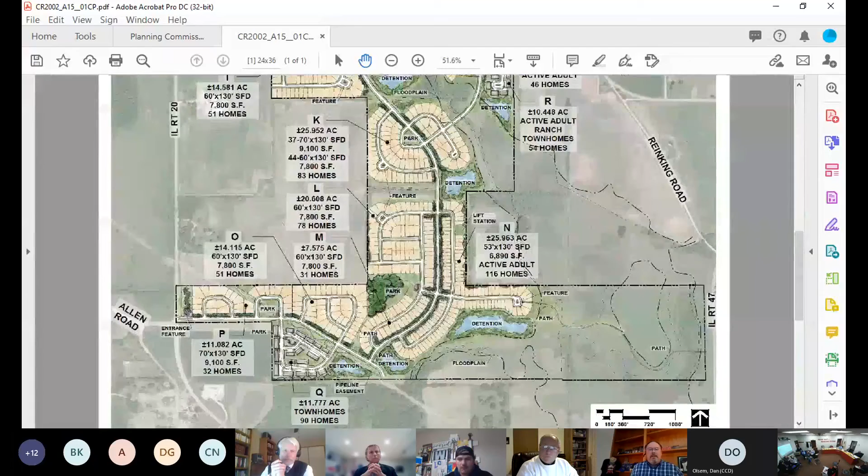And it's a really nice mix. It's not one ginormous spot. It's sort of feathered throughout the site, integrated in, and it goes all the way from the south side of the site to the north side. We're really excited about this. We think the revised plan gives several different types of housing units throughout this entire site, as well as the open space components. We're fortunate enough to work out having the school site, which I think everybody likes to see. So we're really excited. And if you have any questions, I certainly can answer them for you.

Before we go there, one thing I'd like to point out - you heard Rich mention the open space a number of times, right? I think that's the part of this plan I'm really proud of, and kudos to Rich for his plan. At 263 acres, this is more open space than the currently entitled plan. But as importantly, this plan actually impacts fewer trees and wetlands than the current plan does. I think that's a huge plus for the project, and I'm pretty excited about it.

So with that, I'd love to answer any questions the committee may have.

So when you say fewer trees, what's the estimate of total trees being taken down - or those being saved? I'm just curious about the numbers, the data.

Yeah, there are a lot of tree stands, mature oak tree stands on the site. We did do a tree survey, but we haven't actually done a count. It's just those areas, and in particular the area up near the school - there is a heavily wooded area there. Originally, we had a whole neighborhood in that area in the currently entitled plan, with a number of roads going through that area and a wetland in it.

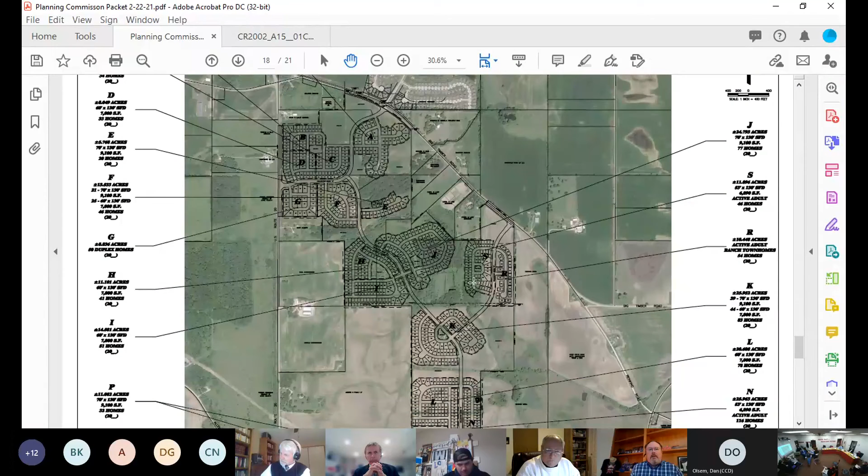And we're actually going to be coming in and planting thousands of trees as part of this development. We'll certainly be able to get you more detail as we develop the landscape plan further, but it will be thousands of trees, and those will be high quality trees, taken care of as part of a larger master association. Again, can't stress enough, the preservation of the open space areas is definitely something we paid close attention to here.

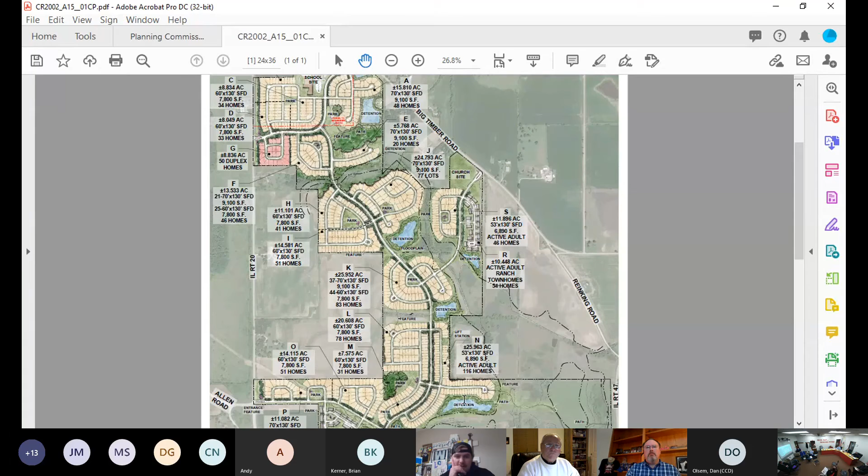Josh, go to the north side and see. Carol will show you. We're right next to the church site. Up that way. And the land that's above the high school is about 100 feet higher than ours.

So we are forced to take that water in every rain. And if it's a 4-inch rain, it's going to be going across the road. It was across the road right in the middle of the road construction this year, right in the middle of road construction in May. May is usually the wettest month.

So that bridge is 91 years old. We're pretty concerned about that.

And then at the Burton and Tuziak in our corner, that is a low spot because the water is coming onto my property in that middle green stretch, which is higher than the center of the road. So when that whole field fills up, then it goes over the road into Miss Burton's.

You got it pretty bad. Yeah, and the county thought they would help her a little bit. They added a culvert, but that didn't help. And then down by the 91-year-old bridge, before there were houses, the water could get around there and get out some, you know. I've been there since before those houses were there.

So sometimes it's 4 inches deep, which is 4 fingers high, and it's 210 feet long, the water that's going over the road. That's a lot of water. You know, that little box culvert is only 3 feet tall and 4 feet wide.

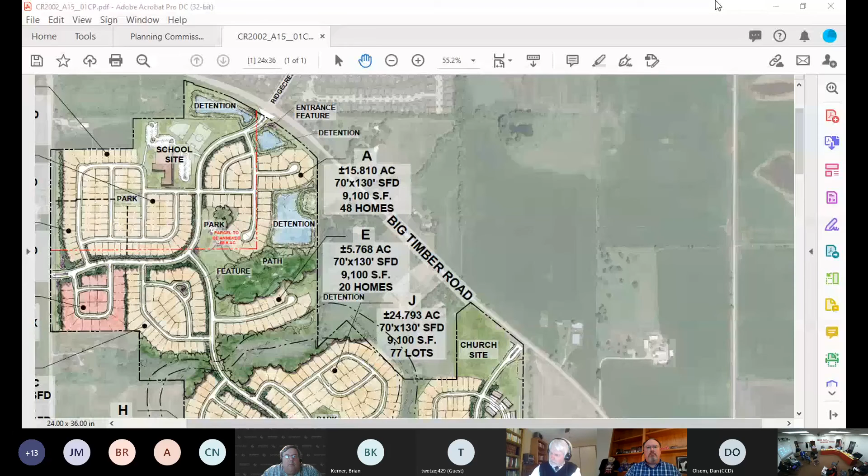This whole area, these are all trees that haven't been grazed or farmed in 40 years. Or is that Jay, I believe. That is Jay. The last fence was white oak fencing down there. It is really up a hill. And they're referring to pod E. Jay. Oh, sorry, John A.

Yeah, there are some trees in that area, and we are showing impacts to some of those trees. But what we do in neighborhoods where we do have trees, and this was on the current plan, the currently entitled plan as well, we'll try to remove as few trees as possible in those areas.

But that's solid trees where you have houses designed at this point. There's approximately, I don't know how many 1,000 foot that is, but that's solid trees, mostly oaks. And you have houses built right over the top of them. You have taken them out. Now how trees...

Roots kind of hold water in a way, which might affect our properties. You take all the trees out, the trees aren't holding the water, it runs more swiftly. Let's just think a little bit more environmentally, perhaps. I'm just throwing that at you all. So, okay, that was my tree thing. Don't get me started on the trees.

Okay, number three. When have the latest studies been done on the endangered species of that property? And are there any new endangered species?

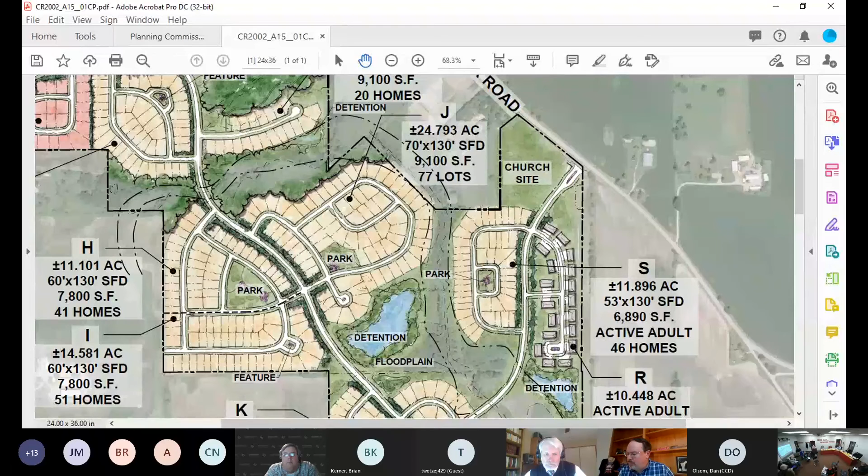You want to know where I am now? Which entrance? Because the entrance is already there and paved and prepared for the primary entrance for the Oakstead community. That's the one down at the end by us across from Lakewood. He's down further from where we are. Have them lower their map a little, other direction. There you go, down, okay.

There was a proposed access right here, right across here. Okay, which is no longer there. Correct, but it's in the county's record because you signed off for it. Yes, and she says it's there. She lives on that side of the road.

Because I've kept it potential commercial, multifamily and whatever. And now that he doesn't need it, it's not saying that if someone buys mine commercially, because the county signed off on it, I think it was every quarter or half mile there was supposed to be a stoplight. The town told them where it was, the speculators told them where it was gonna be. Right, see, some of you guys probably weren't even born yet. We've gone through this, we've been through this, so.

Okay, now another question on that. If the places, or when they are widened, is eminent domain going to be used? And will there be condemnation for the public good, which means we don't get paid?

That, again, I really couldn't speak to. Route 20 is not village maintained, managed, or owned. But Big Timber Road would be entirely county. Even when you get your subdivisions in, it's not gonna be part of the town.

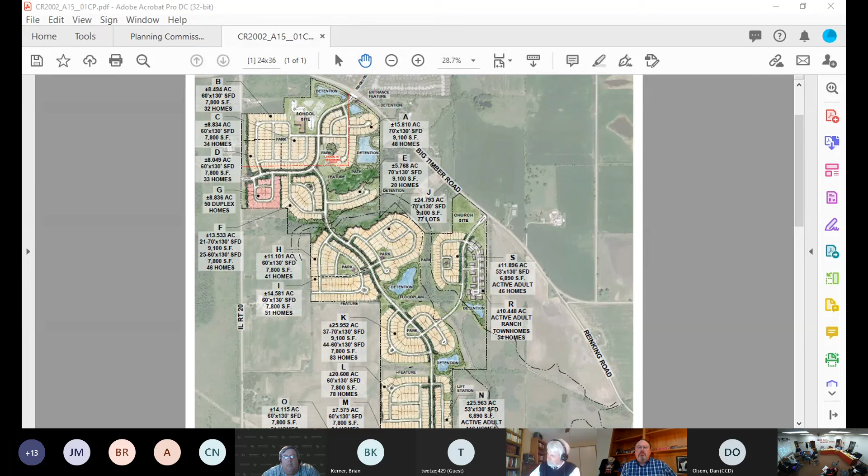If I can put a finer point on it, if we need another access road, entrance or curb cut, does that come before us again as a new proposal or amendment? Well, I guess we'd have to come back anyway. This is a preliminary approval that we're requesting, so we'll have to come back with final approval, at which point we would know whether the agencies would require us to relocate those, and then we'd have to get approval from the village for that.

Okay, thank you. Any other questions, comments from the planning commission? Mr. Rossetti, Mr. Wetzel? This is Bill Rossetti, I'm good, Brian. Thank you, sir. Yeah, I'm fine too, Brian. I don't have any questions.

I have a question for Crown just as it relates to stormwater runoff currently on the site. Once developed, all of the stormwater that is currently overland or within the drain tile system will be managed by a public stormwater infrastructure, correct? Yeah, and Tim knows Kane County ordinance better than I do, but we are required by ordinance that any field tile we encounter, we have to tie it into our system, which then takes it into the detention ponds.

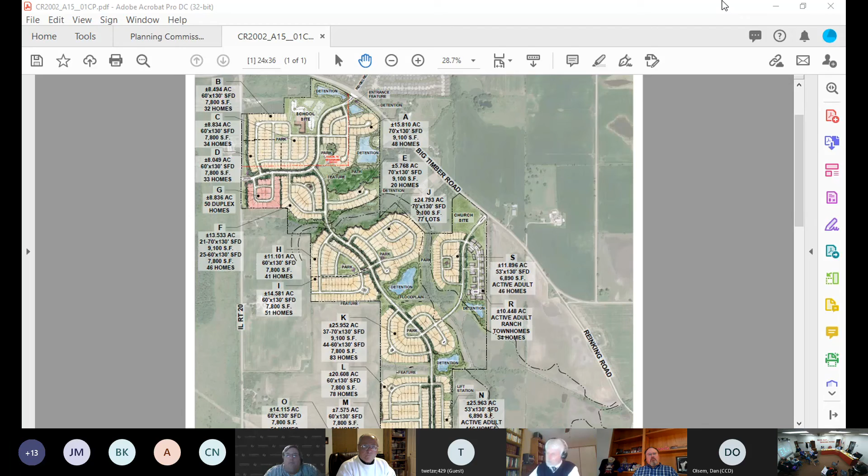So, yes, sir. Now I have a question. Now, what we spoke about this evening, this is all on record, right? Yes, sir. When we talked about how water is going to go into that detention pond behind my property, it's going to leave and go away from my property through some other system to another detention to be pumped to another. Okay, I just want to make sure. Based on my last experience going around with the development, things weren't as, not as much on record, I guess, as a whole.

Mr. Schuster? I'm here. So just in order, so that everyone in the room, I guess maybe including the commissioners as well, can you please give us the layman's definition of what we are voting on tonight? I don't want anyone to leave the room thinking that when we vote yes, we're voting to build this. You know, if you could give us the layman's version of the paragraph-long item that we are talking about and going to vote on today, just so everyone is on the same page as we move towards a vote this evening. I can do that.

At the close of the public hearing, whenever the chairman determines that everyone's had a chance to speak, there will be two motions that the commission should make and consider. One is to zone what Mr. Olsen has referred to as the Wiesman Farm. That's the new property that Crown acquired and wants to add into the Oakstead development. That property, because it's going to be newly annexed, has to be also classified in a zoning category. So the motion would be to classify that property in a planned residential development district, the same as the rest of Oakstead.

After that, the second thing before you tonight is an application to recommend approval of the revised preliminary development plan for the entire Oakstead property, which is now a little larger because they're adding the Wiesman Farm. And they've changed some of the features of the original plan as well. So you're going to zone the new property, and then all the plan commission does is recommend. You'll recommend that to the Board of Trustees for approval, and then you'll recommend approval of the revised preliminary development plan. Those are the two questions before you this evening.

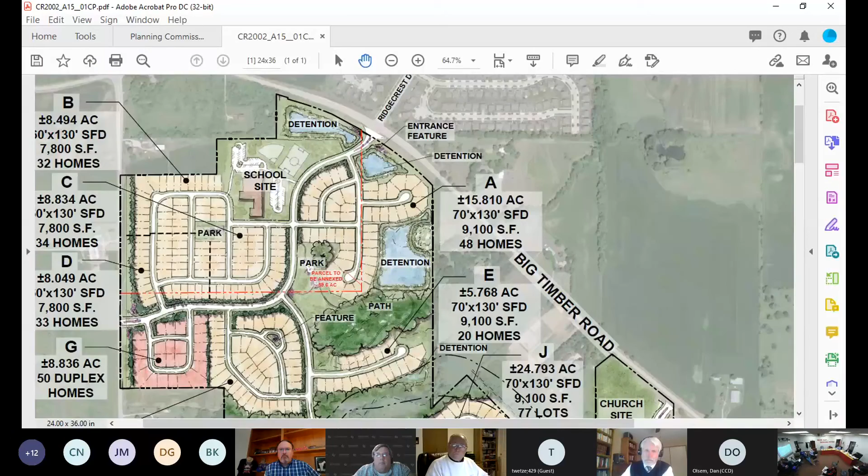Folks at Crown, this portion that we want to annex and add and approve is at the entrance by Ridgecrest and Big Timber, yeah? Yes, I'm sorry, I didn't realize the question was directed to me. I think Josh is trying to show you, see the red dotted line? Yeah, I see it. On the entrance, that's the portion that's being annexed to the village, and that includes the Wiesman Farm.

Understood. Thank you, I apologize. To clarify, the entirety of the school site is within the Weisman annexation parcel. The entrance to the school site is on the original Oakstead parcel. Right, and if I remember correctly, it was gonna go due south. The spine road would head due south to stay on the right-hand side of that dotted line where it currently sits. Where now we're able to be a little bit more serpentine, preserve those park areas, adjust the detention ponds, if I'm remembering from our previous meeting, yeah? That's correct. Okay, thank you.

And I will just make a comment, and this is to the board and whoever wants to listen. I live just north of here, you can almost see my house on the edge of the screen. So speaking for myself, we are not here to leave long-term residents to the tender mercies of some robber baron company. We live in the community and we want to do what's in keeping with the plan, which has been, 20 years? We had a long-term plan set forth before I got here, and we're being mindful of the impact that everyone brought, and I do appreciate everyone's comments.

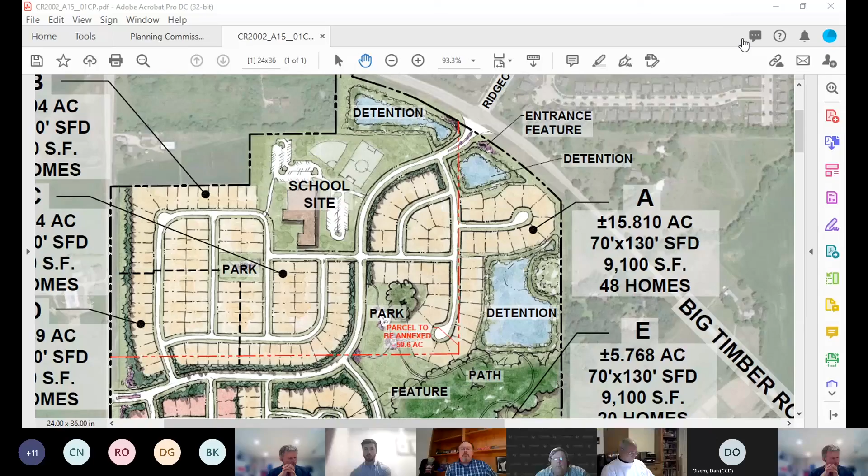With that, I would like to make a motion, Mr. Chair, to recommend annexation of the Weissman property, which is approximately 11 acres at the north end of the current Oakstead development, into village limits. Mr. Chairman, the question before you really isn't the annexation, it's the zoning of that same property. Bear with me for just a moment, I apologize.

We're changing from PRD to E3, is that correct, Mr. Schuster? By default, land comes into the village at E3, so it's changed. The petition is to change it from E3 to planned residential development, which we all call the PRD zone. I had it backwards, I apologize.

Entertain a motion to... zoning. Right, well it's not just that 11 acre lot, it's actually the rezoning of the entire thing, and then approving or denying the recommendation with the changes from the original. So I would actually be looking for a motion to rezone the entire development, correct Mr. Schuster? No, that's not correct. The motion should be to classify the new property, what we're all calling the Weissman Farm, in the PRD zoning district in the village. All the rest of the property is already in the PRD zone, and it's fine that way. So it's just to zone the new 11 acre piece, the Weissman Farm, that's being added in.